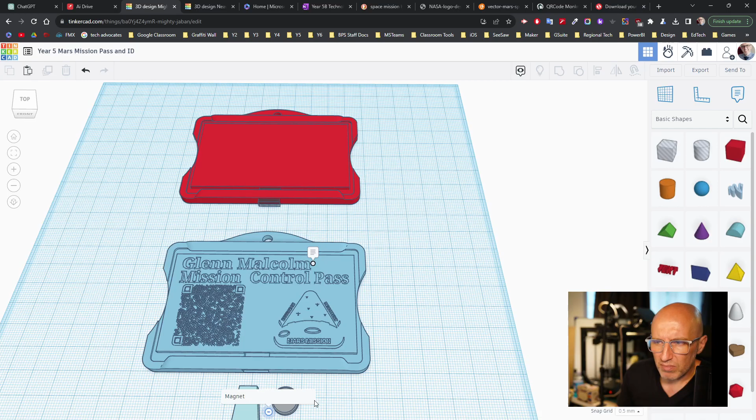Remember, we talked about the word fidelity, or clarity, how clear these words are, because they're so small, how small or clear they're going to be. But it's all learning. On my board here, you will have put a hole in there with those sizes: 50mm long, 10.5 wide, and 3.5 tall.

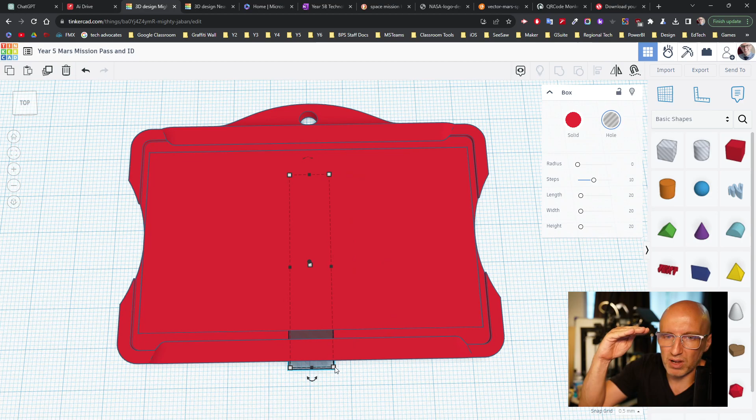Next, we're going to go to import at the top. So right at the very top, it's going to import, and it says choose a file. Now we're going to go and get that SVG file that we talked about before and created. I'm just going to move this out of the way. There it is. Now, because you'll probably be on MacBooks, your downloads will be on the side here somewhere, similar to where mine are, right here. So I'm going to go into here and double click this and open it up.

When you come in here, it gives you an option for art and artboard. We don't want the artboard, we just want the art itself, so it trims everything else around the entire shape. You can only have a maximum of 1000 by 1000.

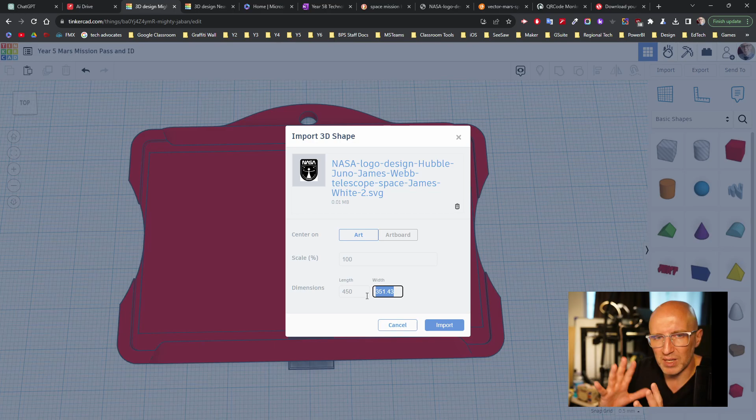In here, you can see that it is 450. But if yours is huge, every time that you change this - if I put 450 in here, the other number next to it will change as well. So it keeps what we call the aspect ratio. If you pull one side down, it'll measure that and make sure both sides are the same, so you don't get something squished or stretched.

The images are quite big. Generally images off the internet are quite large, or the ones we get for this application. So when we put them into our workspace, into our work plane, they tend to be quite big, and the bigger they are, the longer they take to come into Tinkercad. So I'm going to put this at 50% so that we can give ourselves a little bit of wiggle room, and import this now at 50%.

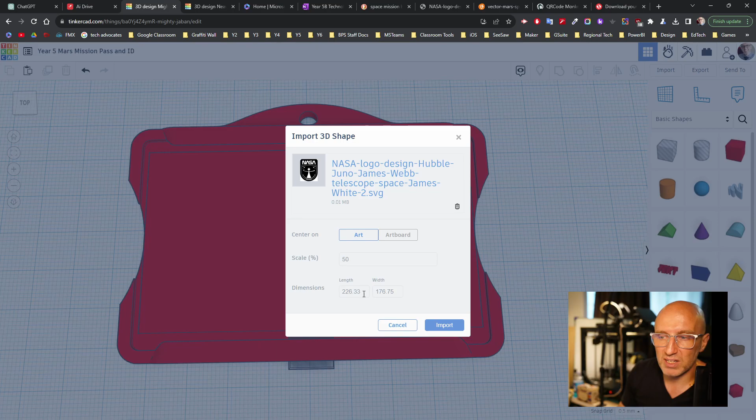I change this to 50, and you can see immediately it's gone and changed the actual sizes here, so we've got 50% of it, and then go and import.

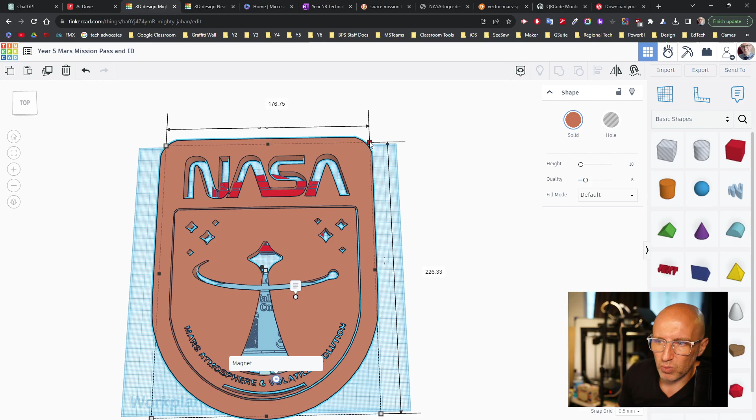Okay, that wasn't too long at all. I thought it might be a bit longer than that, but you can see I've got some text that's been taken out where the white was before, which is quite nice. And I've got what seems to look like a CN tower in the middle of it, which I quite like. So then I can go and bring this into my artwork.

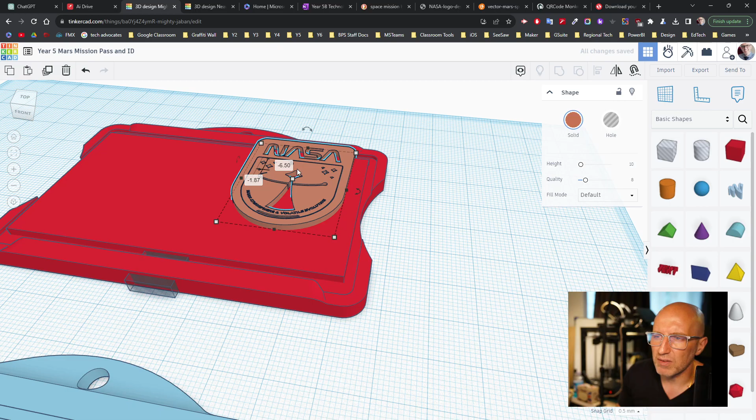Whoops, don't want to do that. If I zoom in here, we can see what's going on. And then bring this up, and I don't want this to be any taller than 2mm high, because that's totally fine, plenty enough. Because otherwise, the more complicated it is, the longer it's going to take, and to be honest, I don't want to be printing these all the way to the other side of Christmas. So that looks quite nice.

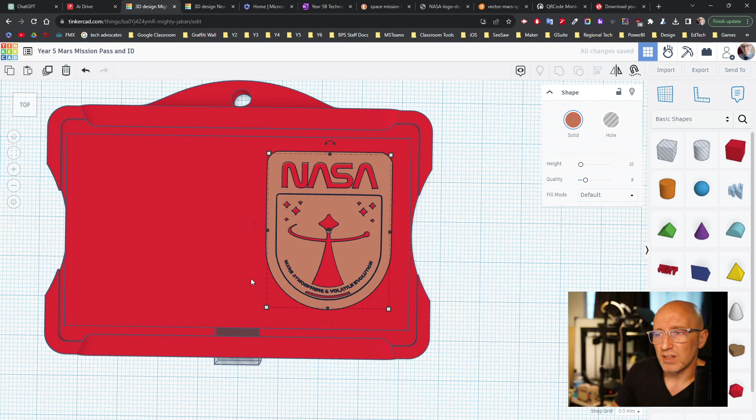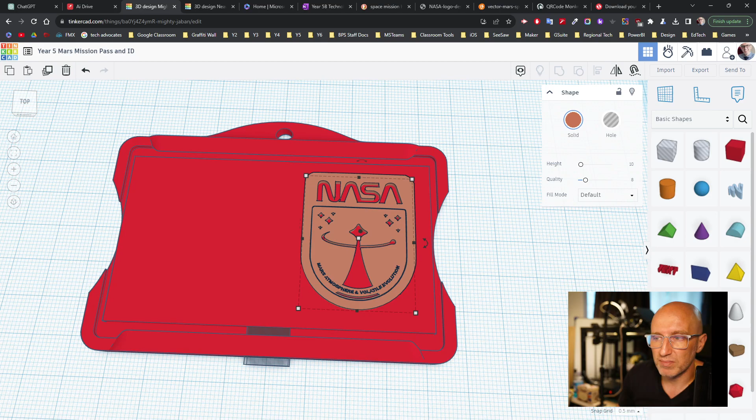Remember, it's going to be one color, since we don't have multicolor printers yet, but they should be on the way soon. So we've got our badge now. Once you've placed it and you've got your text and arranged it all nicely, we're going to go on to the QR code, which is quite nice. Once you've got that in, we're ready to go to the next stage.